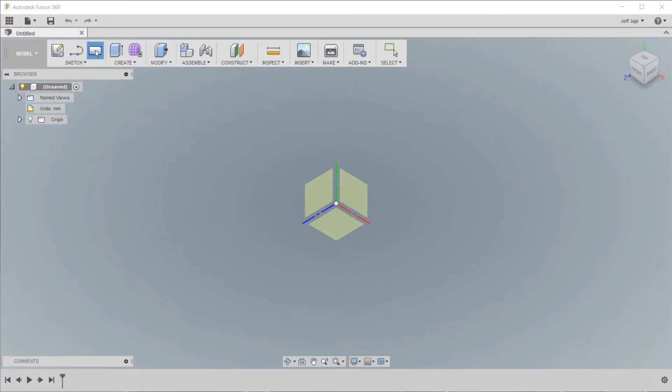Remember, this is just one method of designing this knife. There's going to be lots and lots of methods. So I'm going to start by making a rectangle for the basic shape of the knife. And I'm going to type in the values for the length and width, 31.8 millimeters. That's 1.25 inches. I don't know what 12 times 25.4 is, so I just type it in as a mathematical expression and pan this over. So this is going to be basically the blank of material that we're working with.

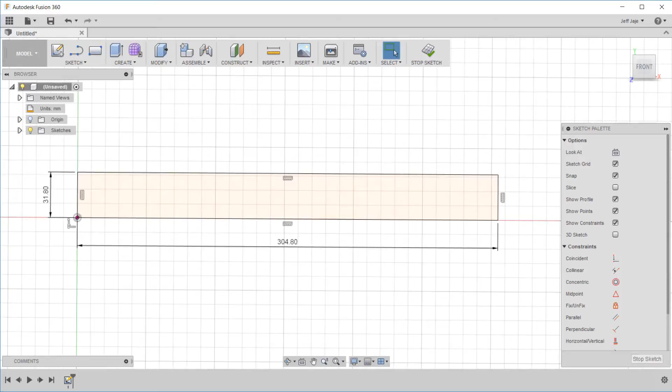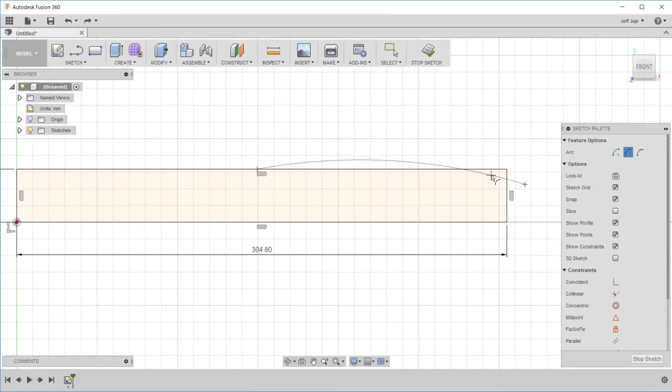And from here, I'm going to go ahead and create an arc. And in this case, the arc is going to be a 3-point arc. I'm going to pick on the line, the end of the arc, and then the third point is actually kind of the direction for curvature. Now what I want to make sure is that the end of the arc is tangent to the line. And we can actually see that tangent icon there. So we're good to go.

I'm going to create an arc at the bottom too. And basically do the same thing. Now we're not following a drawing. We're only making this to look good. So we're not necessarily trying to be exact or trying to match the sample knife exactly.

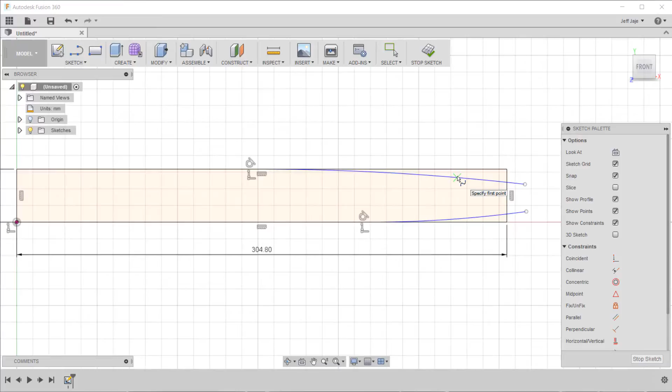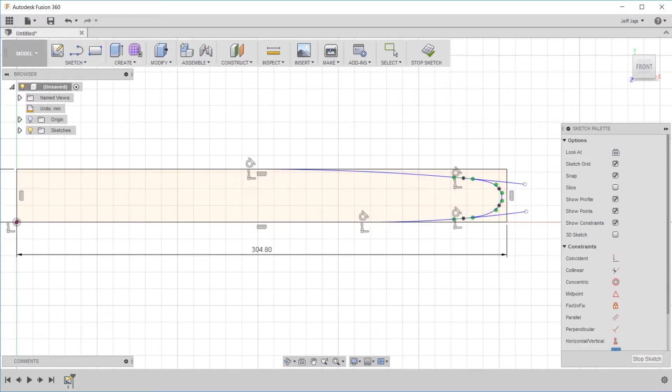To do the end, I could do an arc, but what I'm going to do is a spline. I'm going to snap on this arc here, give it a couple of points outside of that, and then snap on the other arc. And then I'm going to go back and tell it to be tangent to both of those arcs. So we're doing the tangent constraint coming up right now. So I'm going to say, let's make that spline tangent to that arc. Let's make the spline tangent to that arc. And if I pull on the spline or modify it or something like that, it's going to maintain that tangency condition.

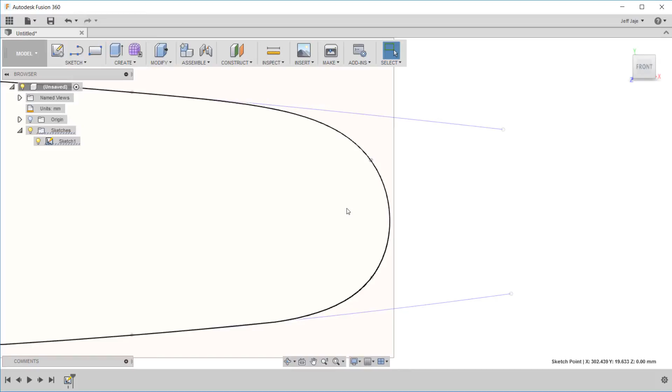So now that I've got the sketch and I've got that spline, I'm going to stop the sketch, zoom in. I'm using the middle mouse button basically to pan and zoom. And I can grab that spline and dynamically drag it, and notice it maintains the tangency condition with that arc. What I want is a nice rounded end on it, because again, we are using these for training with real people.

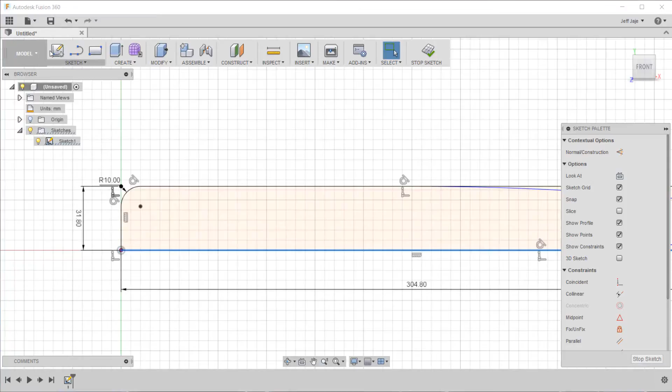Now what I do is I right click on the sketch and I go back to edit the sketch so I can put more changes into it. From here, I'm going to go ahead and put some fillets in the corners of our knife. So I can give it the fillet. You can go right into the corner and snap or pick both lines. I'm going to give it 10 millimeters in this case and do 10 on the other corner as well. Entering the fillet command again. There's probably a shortcut for that. This is an introductory video.

From here, I want to go ahead and work on the hand grip portion of it. And again, this is very subjective. We're not going off of a drawing. We're just going to make something that's big enough and hopefully comfortable. So using the original as a model, I'm just drawing a couple lines in here at an angle. I'm going to put one about 3.5, 4 inches down. One way to do this is just count the little squares to see where you are, if you just want to do it freehand versus drawing something in and adding dimensions.

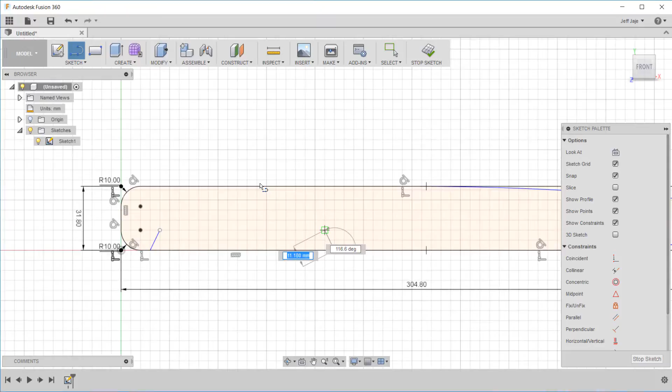So I'm going to put the other line in. And after I do that, I'm going to do another 3-point arc. And that's going to be the hand grip for this. Before I do that, I'm going to measure from the end of one of these lines to the end of the other. And I'm just curious what that value is, to make sure that the distance is big enough to fit most people's hands. Here's our dimension, 95 millimeters, a little bit less than 4 inches.

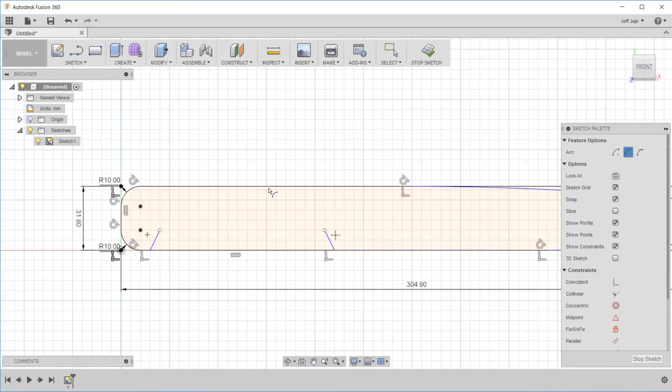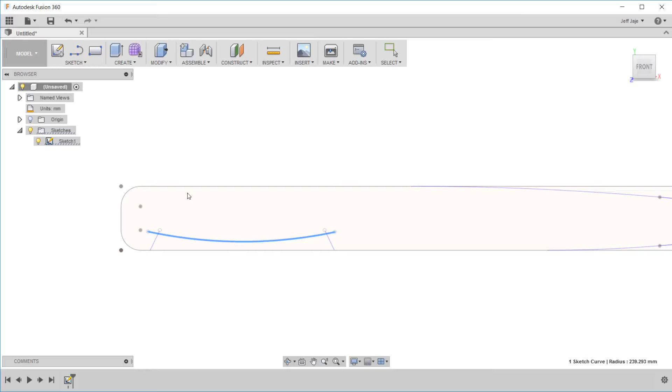So now I'm going to do my 3-point arc, and again I'm going to pick the 2 endpoints, and then the third point kind of gives us the direction of curvature and how much curvature. Visually this looks pretty good. It actually looks a lot like our sample. Now that I have this, I'm going to go ahead and add some fillets. Before I add the fillets, I just graphically move that arc up a little bit to give the finger guard a little bit more space to guard the fingers.

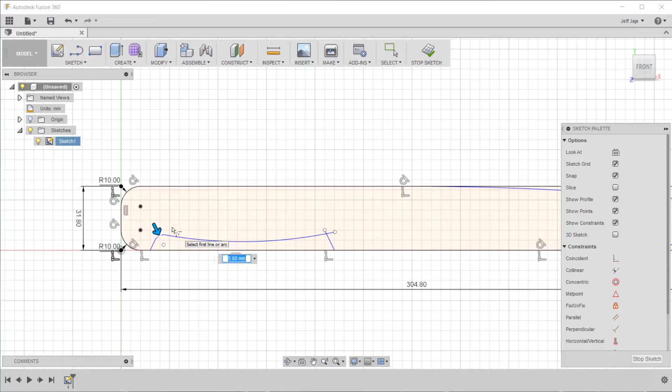Go back and edit the sketch. We're going to add the fillet. This time I'm going to use like a 5 millimeter fillet. And same thing down on the other corner. We really don't want any sharp edges on this because, again, we'll be using these in training with other people. So I'm going to get rid of the sharp corner at the finger guard also and put a 5 millimeter fillet in there.

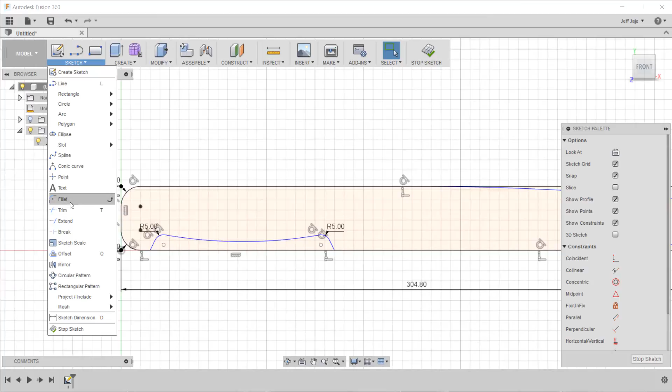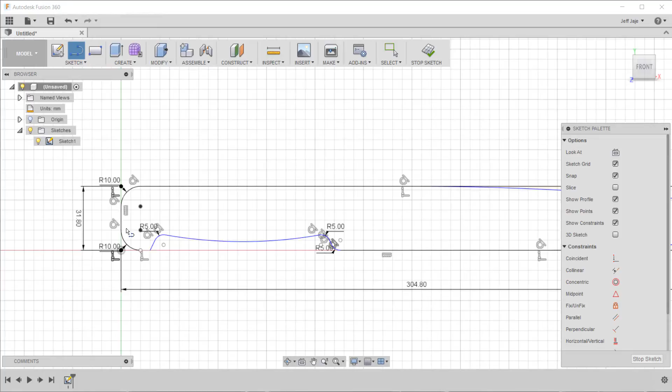Now, interestingly, because that was one line, it got cut away and trimmed, so I need to bridge this gap first with a new line from the end of that arc to the end of the line. So that's a closed contour again, and now I can go back and add that fillet.

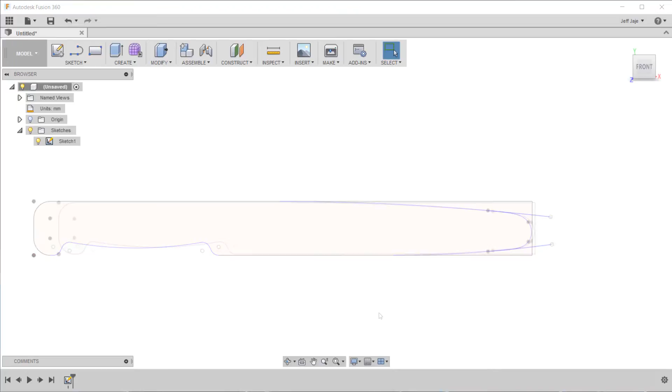Now we could extrude this and make our knife right now, or we could add our holes into it, and that just comes down to a personal preference type thing. Again, there's always more than one way to model something. We can extrude this into the thickness of our shape and add holes, or I can add the holes as part of the sketch, just put some circles in as part of the sketch. That's what we're going to do here.

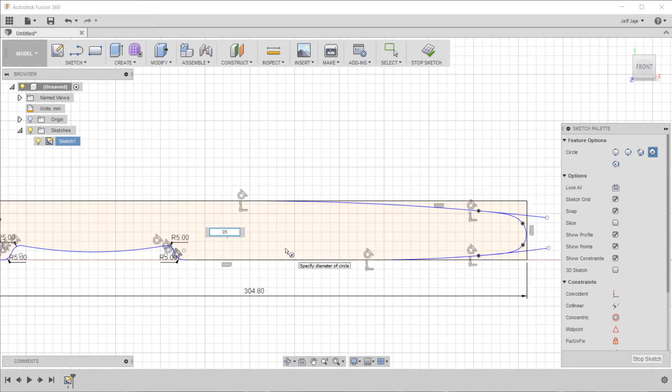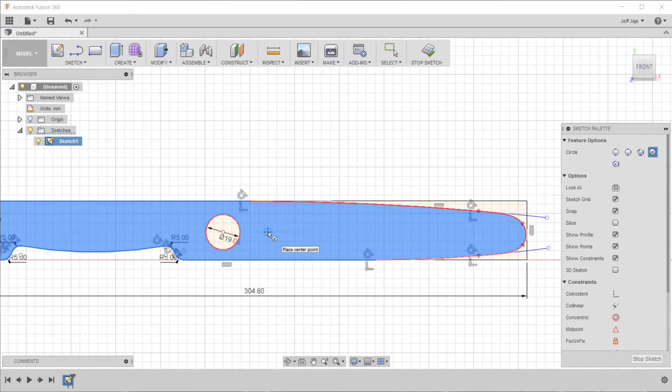Now we're actually going to do this the slow way just for fun and practice. However, you could make one circle and then make multiple copies of it and then extrude it, and that might save you some time, but in this case I'm just graphically going with the grid here. I want these circles to be about 3/4 of an inch. That's 19.05 millimeters. So I'm going to put the first one in, and then start adding a couple more. Put the circle, the center point, 19.05. And then we're going to add 4 more holes.

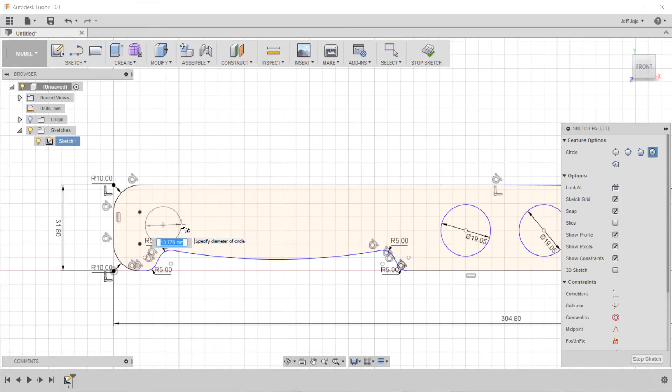Now that I have all 5 of the holes in, I'm going to add 2 smaller holes that we will use for wrapping our paracord around the handle to make the handle just a little bit more comfortable. So again, I'm going to go to the circle command, center and diameter. I'm going to pick close to one end and say that it's a diameter of 4. And the same thing on the other end of the hand grip.

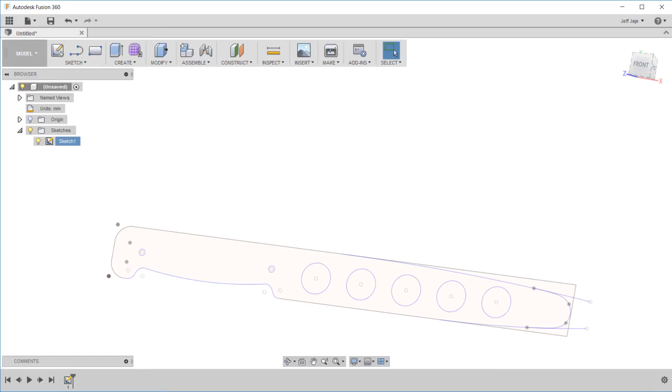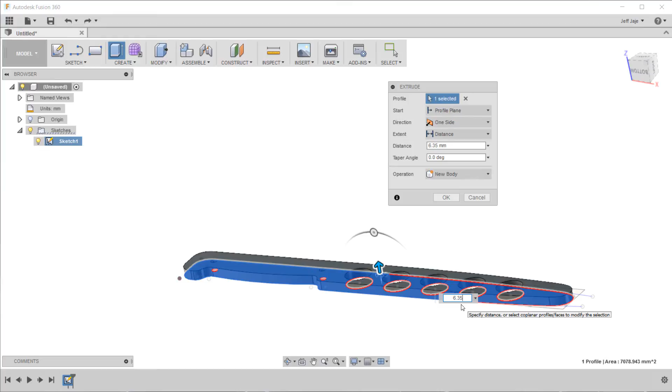Once that's done, I'm going to stop the sketch, zoom out a little bit and rotate it, and take a look at how it looks. I'm pretty pleased with the result, so our next job is going to be to extrude it. I'm going to go under the Create menu and say Extrude. And then I'm going to pick my profile. I'm going to tell it I want it to be 1/4 inch thick. That's 6.35 mm, for those of you who work in metric land. And once I've got that done, then I can rotate my part and see how I like my design for my practice knife.

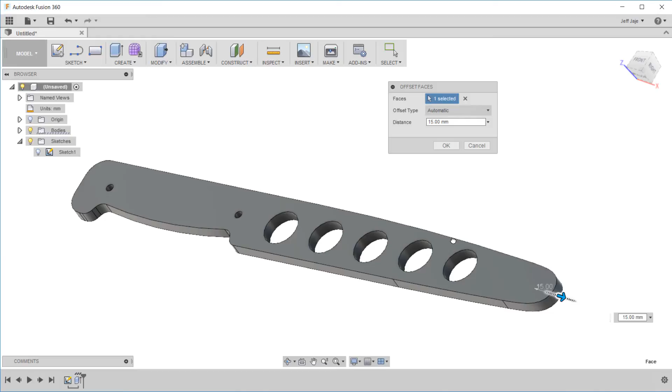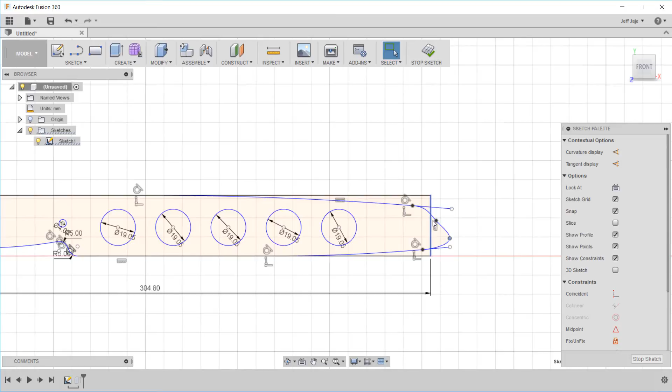If I decide I want to make the knife a little longer, one of the nice things I can do is just modify and press pull on that edge or end of it. Besides editing it on the solid model directly, I can always go back to the original sketch and edit that. So I can go back and activate the sketch and drag on some of those points also, and modify my blade that way, again maintaining all the tangent conditions that I had specified earlier.

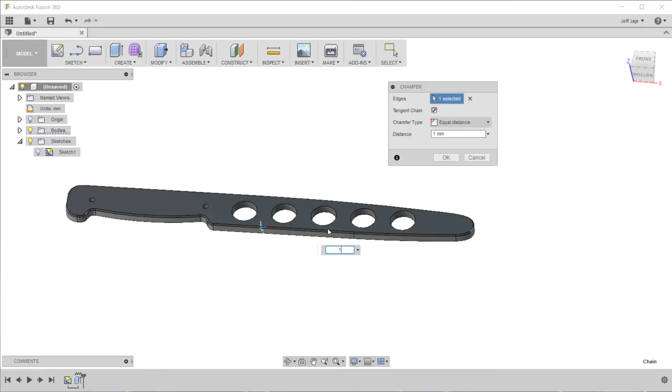Now what we're going to do to knock off any sharp corners is create a chamfer on the edge. So I'm going to say modify chamfer. I'm going to make a 1 millimeter chamfer, and I'm just going to pick that edge of the part. Now you could have picked the top one and the bottom one together in the command once. You don't have to run the command twice as I'm doing here. Those are just some ways that you can do things more efficiently and quicker. We're just trying to get through the part and show it as a tutorial here. I'm going to eventually add some chamfers to the holes, and we'll get to that in just a minute off screen.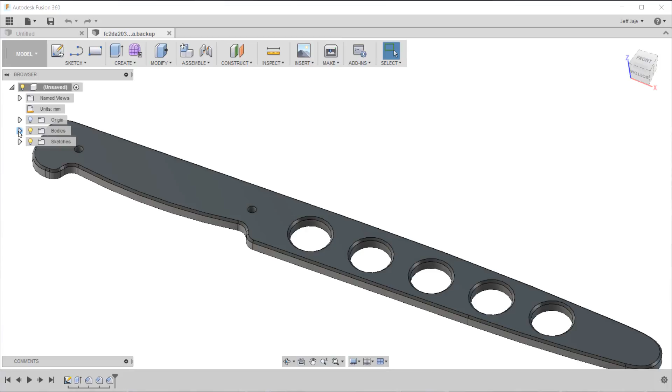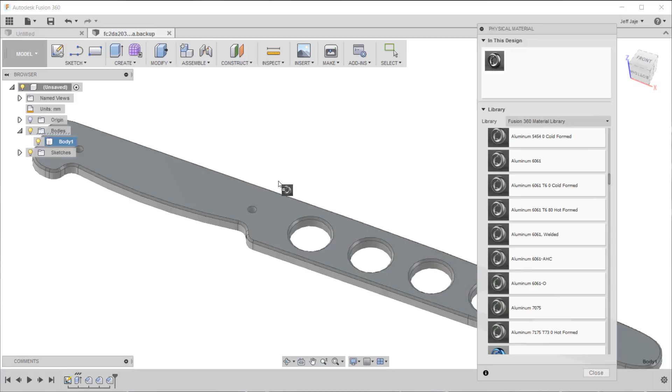From here, for fun, you can assign a material to the part. So I'm going to go into my bodies and right click on the body, and I'm going to say physical material, and it brings up a dialog box. It's off the screen, multiple monitors. Drag it over, and I'm going to tell it it's aluminum. In this case, it actually is aluminum 6061, so I'm going to choose that, and you can just drag and drop it onto the part, and it sets that material properties as aluminum.

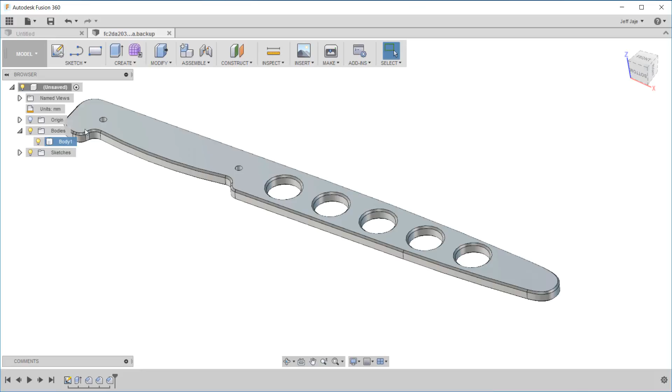Besides assigning a material to it, you can also assign a material for the appearance, for rendering. So maybe I can pick a particular material, and that's what it's going to look like on the screen. Or I'm going to come back and actually choose a blue anodized aluminum. So I'm going to say appearance. I'm going to pick the anodized blue, drag it onto the part, and close that out.

So what you can do from there is you can actually go to the render options and tell it in-canvas render. So there's cloud rendering, and there's rendering using the local CPU, and we're going to use in-canvas, which is using the local CPU, and it just keeps iterating multiple renderings.